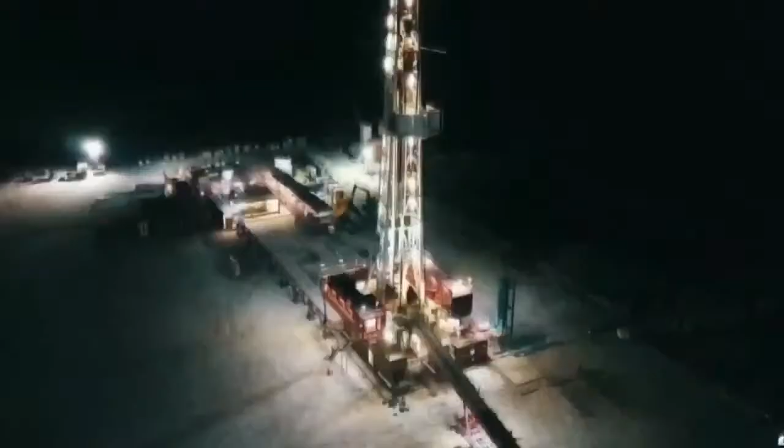Hello everybody, and welcome to the VDoor Locksmith Show. I totally forgot to put on my microphone. Gosh, where is that? The simple things that I forget. I haven't done the show in a minute. Wow, this is all wound up back behind here. We'll get to it. There it is. Rookie mistake. There we go, maybe now people can hear me better.

Okay, there we go. Hey everybody, welcome to the VDoor Locksmith Show, where I'm your host, David Gibson, where we're unlocking the secrets to success in the oil and gas industry, one interview, one presentation, and one technical screw-up at a time. Hopefully that's our only technical screw-up for the day, and it's on my shoulders, which I'm more than happy to be able to put that burden on my shoulders.

So happy everybody's here with us on an amazing Friday. This is the start of summer vacation, summer break. Kids are out of school. They're already sleeping in, having a fun time at the house. So today they asked if they could watch one of their favorite YouTubers today. Hopefully they're watching right now. Hopefully I'm their favorite YouTuber. Highly doubt it, but maybe me and Mark Rober can battle it out on who's going to watch today.

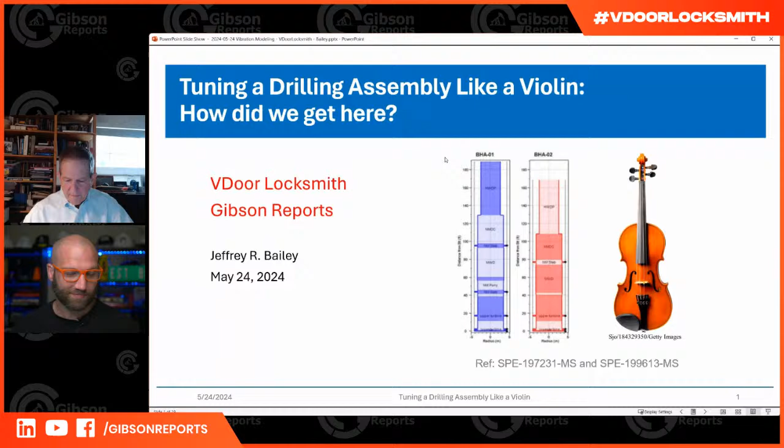Again, thank you, David, very much for having me on the show here. So I do want to start off with acknowledgements. I worked with many colleagues and managers. I saw Jeff McEachern's on the show, I worked with him some when he was at Eastern Canada, ExxonMobil. And this project ended up being quite well supported by the managers. Basically, from the middle 2000s until I retired, it was strongly supported by ExxonMobil management. There are so many people that I was involved with over the years that I really can't possibly name them all, but I will name three.

Fred Dupriest had a big impact on this because he recalled that I did the work in the early 90s, which we'll talk about a little bit. And then, of course, Paul Pastusek, I worked next to him for 15 years, and we had a lot of interactions on so many projects. The third person I'll mention is Greg Payette. He's a younger person than Paul and me, and he really has a lot of energy for data and data mining. I think he's going to have a great career. We had many great rig trips and stuff, so I really appreciate working with Greg.

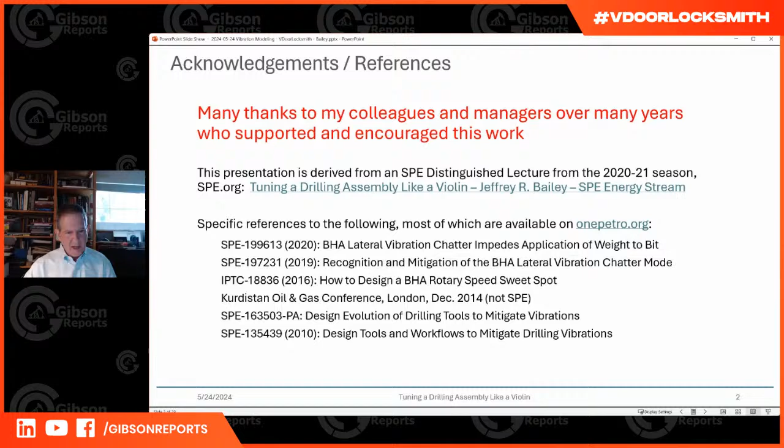But then there's like dozens of people who also were involved. So this presentation comes from the SPE DL. I'm going to have specific references to six references, five of them are SPE papers on onepetro.org. And then I do have one slide from the Kurdistan Oil and Gas Conference in London in 2014. I didn't go to that conference, the drill team sent me the slide, and I just included it because it's a good reference. So let's get started here.

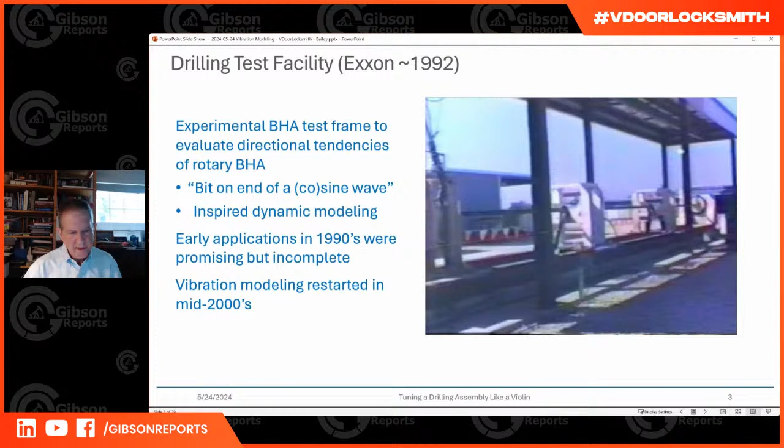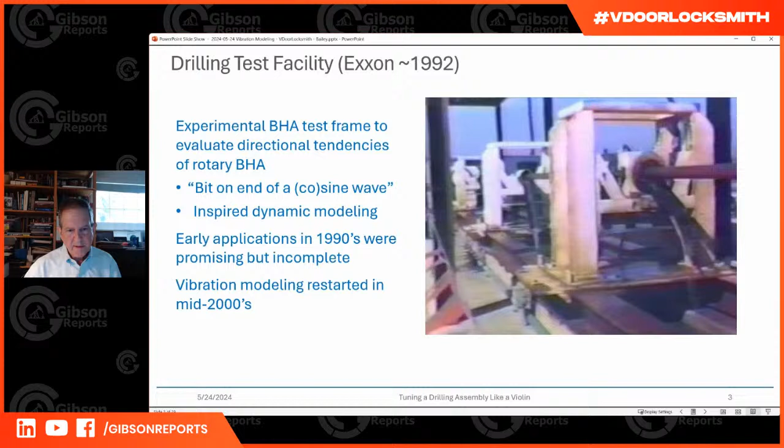So yes, I hired on in '89 with Exxon, and they wanted to understand bit walk. This was before rotary steerables, and there was a lot of platform drilling where they used rotary drilling to gain ROP. They did make runs with motors to make the turn, but then they went to rotary drilling. Here you see shots of it. Now we'll see a video of the movement.

The project was to take data from this apparatus and determine directional capabilities or tendencies of bit walk. We had an instrumented strain gauge at the bit measuring side forces and vertical forces, getting means and standard deviations and all that. But I wasn't actually able to transfer that into any knowledge about which way the bit would walk.

But we did develop a dynamic model, and we used it on some wells in the early 90s off the coast of Alabama. There was good traction with the drill team, but again, like I said before, we didn't really solve directional walk. So they wanted to put me on a different project.

But when you saw that movement, Fred always says the bit is on the end of a sine wave, and I put in the cosine here — I'll explain that modification in a few minutes. But certainly this apparatus inspired the dynamic modeling, and we had those early applications in the 90s.

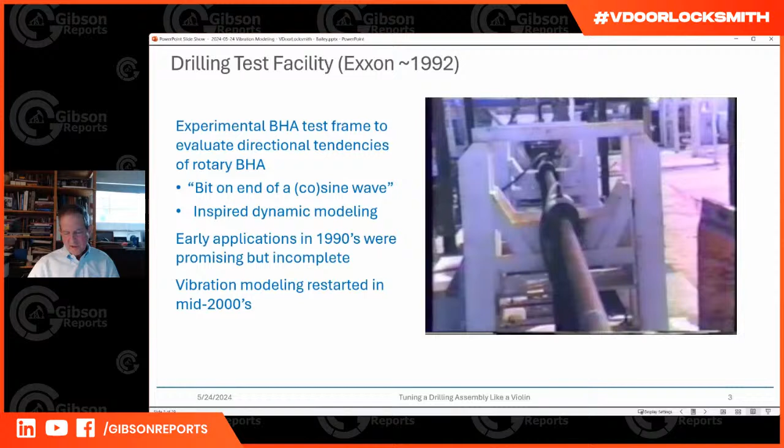As I said, they're promising but incomplete. It was laid down, and I worked on something else. Then Fred, in the middle 2000s, recalled that we had this vibration effort, and we broadened it to include torsional dynamics, involving the corporate strategic research up in New Jersey, Deniz Ertas. That became its own thing, but they were kind of coupled because they had very similar properties as two models. So that's kind of the origin.

Back in the middle 2000s, when we started to apply this, we took the C code and made a MATLAB model out of it with graphics, so we could do comparative analysis. We'd go out to drilling engineers and drill teams, and they'd be very interested. Of course, we had to work with the vendors, and we got a lot of reactions from them — there was a tremendous amount of myth busting going on.

Some of the things people said to me, which I recall very strongly — one person said, you need to stabilize every connection because if it can't move, it can't vibrate. That's a perspective I think is really misleading.

Then someone else said, we did a normal mode analysis on every BHA we ran in this field, but it didn't help, which was interesting. And then someone else said, you're telling me the exact opposite of what the vendor told me for many years. So that was also very interesting. Maybe we'll understand why in a couple minutes when I explain something.

But basically, we found no comprehensive understanding of how to approach drilling vibrations and BHA design through stabilizer placement, at least that I was aware of. There was a BHA run in South Texas by some people, developed empirically in the field as a low vibration BHA. We put it into the model and it actually looked pretty good, but I think they didn't have a model that did that — it was really just empirical. So people have figured things out empirically, but in terms of having a basic understanding through a model that could use different parameters and come up with a prediction, I felt the field was lacking in certain respects.

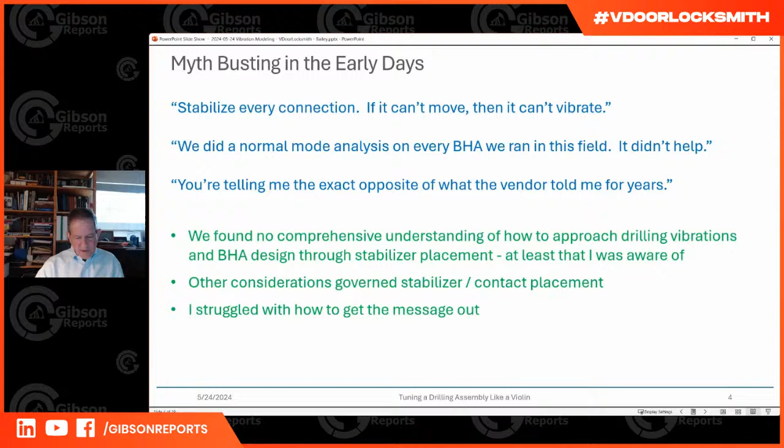So I came up with this slide. I had 3 kids, and they all played instruments, and they were in orchestras and whatnot.

I noticed every single time musicians played, the first thing they did was tune their instruments. So I started thinking, well, what we're doing is running BHAs without any tuning. If you go to a concert, how would it sound if the musicians did not tune their instruments?

I think that's pretty much what we're doing in many respects in the industry. We're running multi-million-dollar hardware into the hole, turning it, putting it through huge forces and moments, and expecting it to come out in one piece. But in many cases we're not even bothering to tune it for the operating conditions we're going into. So I thought maybe this was one way to get the message across that we need to do better. We need to tune our instruments.

When I started comparing the violin on the left with the BHA on the right, I noticed the drilling assembly is actually a lot more complicated than a violin. A string on a violin can pretty well be represented by a second order differential equation with two basic fixed nodes: down at the bridge, where the string is held, and up where the musician places a finger on the fingerboard. That length, and of course the tension in the string, determines the note that's played. So you really only have two fixed nodes.

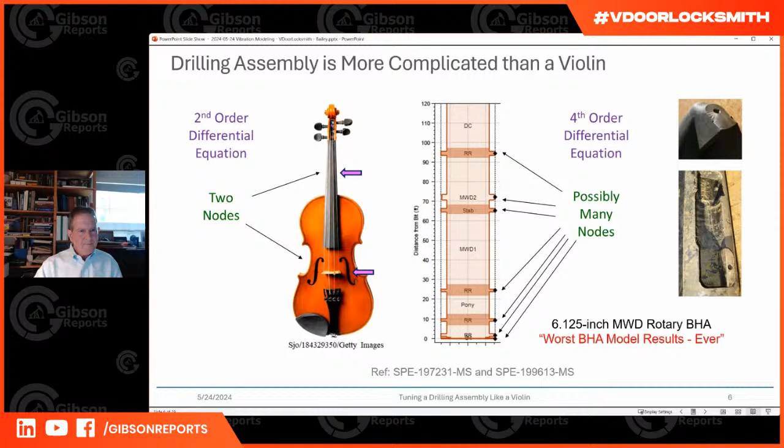I want to explain very graphically how this model works. It's a forced frequency response. As you see here, the BHA, the rod there with the striped tape on it, is being pushed laterally in an up and down, reciprocating motion. That's essentially what we're doing in this model.

We're pushing on the bit with a constant dynamic force, and then we vary the RPM. That's why I call this a cosine, because this is not a sine - we're not assuming the bit is a node, we're actually assuming it's an antinode. We want it to be a node, but that's in the case of a quiet BHA. In the case of a disturbed BHA, it's actually not going to be a node.

From this excitation, we calculate states all along the BHA - we'll see that in a minute. We calculate the bending strain energy across the entire BHA, and we call that a vibration index. Then we compare that response with different BHA designs with the same amount of excitation.

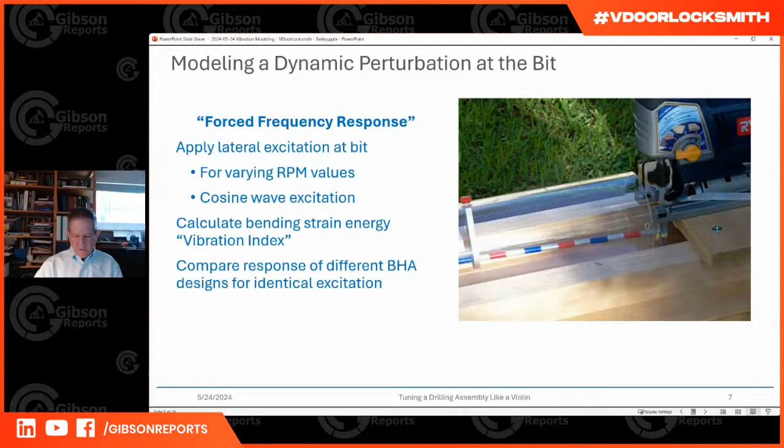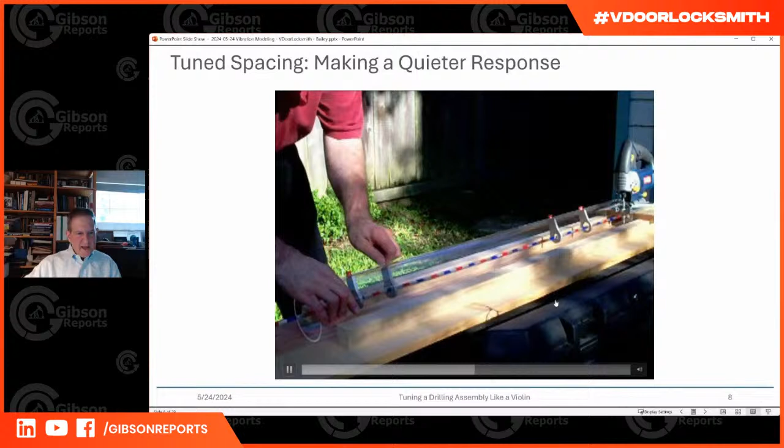We have a couple videos here showing this. In this case, we're going to move one of these blades and show a quieter response. Here we get quite a bit of displacement in the middle, but when we move this blade down, you'll see the response flatten out. Okay, so that's a fairly quiet response at that RPM.

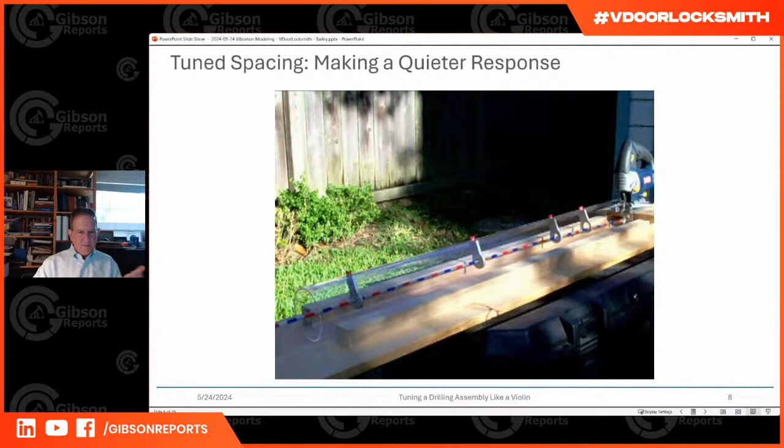What we really need is a BHA that has a quiet response across a range of RPMs. So in this, we'll show how this BHA has a smooth response across a range of rotary speeds. We're making it go faster and faster - you can see it's still pretty quiet.

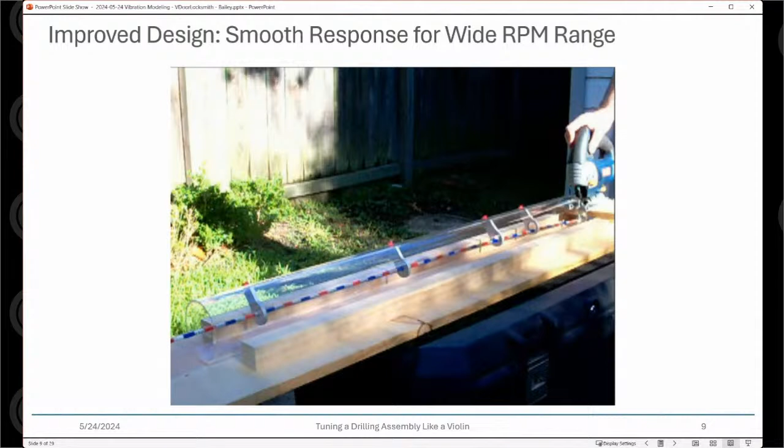So that's ultimately where we'd like to go - to get every BHA to have a flat and low response across the entire RPM range. It's actually hard to do. There are many challenges to get there, but that's where we're trying to go.

Okay, so Dr. Bailey, before we jump into the next part, we did have a couple of questions I want to get to. Robert asked, how about the model that was taught by Don Dareing and Bill Maurer in the 1980s?

Right, I'm somewhat familiar with their work. I wish I had a direct answer to that question. I'm sorry, I don't. Yeah, Maurer led those DEA projects and did a bunch of stuff. I actually don't know how it compares. I'll be honest on that one.

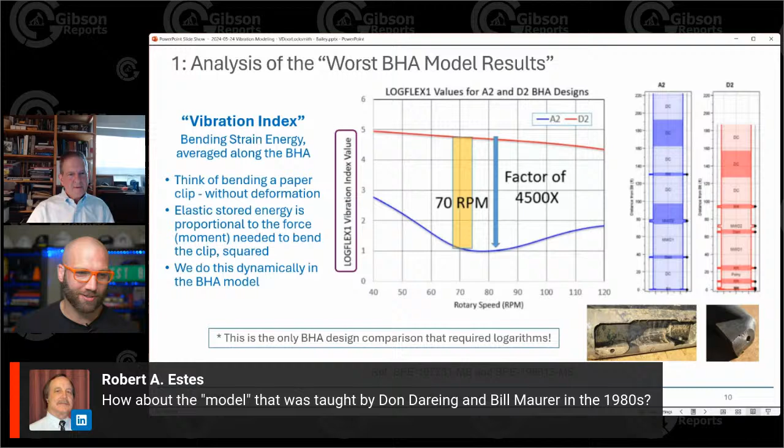Do you feel this lack of tuning has always been a problem, or is this something newer in the industry with all of the headcount reductions and economic pressures?

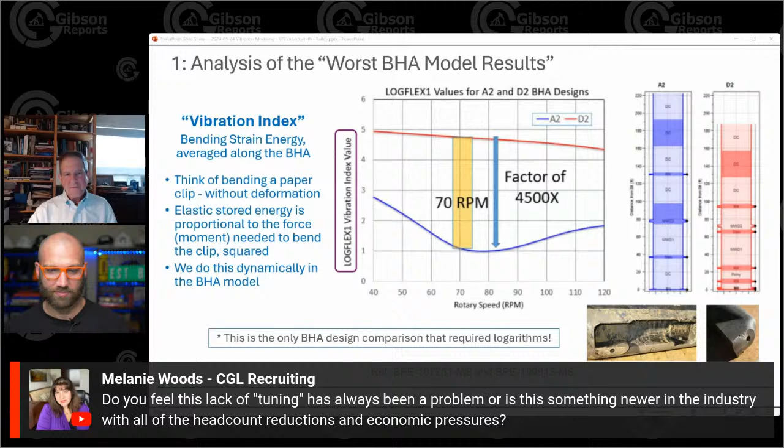No, I don't think it has anything to do with headcount reduction and economic pressures. This is fundamental physics. It's really a challenge that gets bigger as we get more complicated tools. As we run, like in some of the deep water applications, we're running multiple MWD tools, and then we're putting deep resistivity tools in there, and some of them are stabilized, some of them are not stabilized. And then at the top of all that, you have an underreamer. So you're cutting more rock, and you're trying to manage the weight distribution between the underreamer and the bit. And I think the problem is harder when you get more complex.

Now go to the other extreme. If you just have one stabilizer on a motor, you've got only one nodal point to worry about. And I guess we talked about that a little bit at the IADC. And that becomes a simpler problem. In fact, when you don't have any stabilizers, you can't use this model because it doesn't tell you anything. This is a tool to place stabilizers. And the more complicated the BHA, the more you need to use this model.

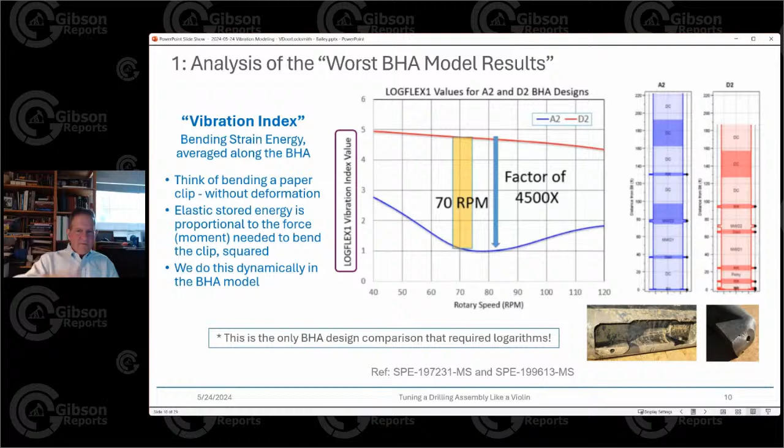So we're exciting at the bit, just like you saw in the videos, propagating the wave up the BHA, and then just summing the bending strain energy.

And so every beam has 4 states. The lateral deflection, its first derivative is the angular deflection. Its derivative is a bending moment, or related to the bending moment with some constants. And that has a derivative of the shear load. And so these large discontinuities in the shear load occur where there's a huge change in the bending moment. And these are driven by the little dots here where the nodal points are. And so you can see right where there's these 2 red dots close together is where this thing starts to take off.

This is why the change in that bending moment is related to the contact force. If you think of a beam of W weight per unit length, and it's of length 2L, and you just support it in the middle, the force is going to be 2 times WL. And that force is distributed within the beam by a positive shear load to the right of the contact of plus WL, and minus WL to the left of the contact.

So the change across the contact of the shear load is 2WL, which is the contact force. Every time there's one of these flat sections where the shear load is changing across the contact, that difference is the contact load. This is a dynamic force required for compatibility for the BHA to stay within the borehole. Otherwise, the displacement constraint wouldn't apply, and you wouldn't be in the borehole. So this is governed by the mechanics of the beam lying within the borehole.

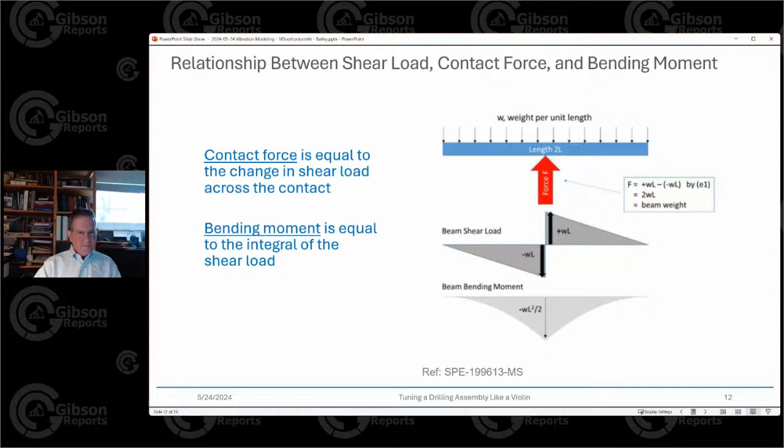When you get this huge change in the shear load, you have a large dynamic contact force. And of course, that gives you dynamic torque, which gives you difficulties in drilling. So we take this bending moment, sum it over the entire BHA, and call it an index, a vibration index.

Stepping up, what factors really govern stabilizer placement? There are common factors, like directional control, which certainly applies to the first three contacts. But a lot of the BHA is beyond where there's the first three contacts in many BHAs. There's the concern to have the LWD proximity to the bit. A lot of times you're struggling to get the tool that's most important for formation evaluation close to the bit so you don't drill much hole before you evaluate the formation. That is a legitimate concern. So you can see there are going to be trade-offs here.

Then there's what I've heard: we want to keep the BHA off the borehole wall. I think what they're really getting at is we don't want to damage the BHA. Maybe there are unintended consequences where we design something to keep the BHA off the borehole wall, but end up generating more problems by doing that than if we relaxed that constraint a little. That's related to the next one, which is protect the tools. These are some of the reasons I've heard for stabilizer placement - some are preferences, some are governed by the drilling mission of trying to get data. But people don't usually move stabilizers to improve the drilling dynamics. We'll talk about this example in a minute.

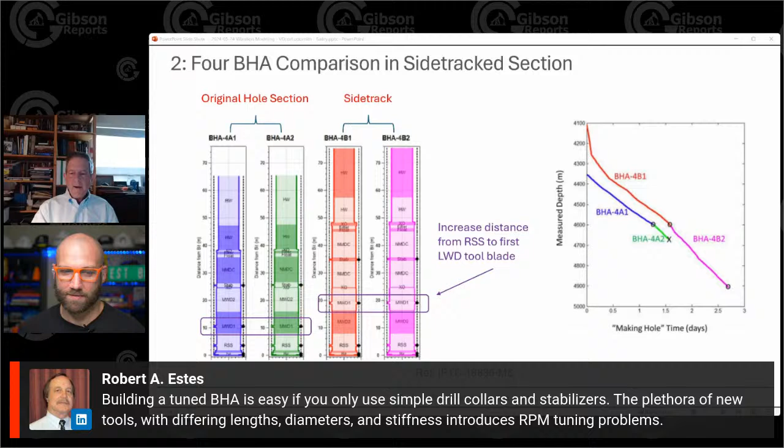If you do this a number of times, you start to realize that what you like to do is have it more constrained closer to the bit. Then as you go up away from the bit, you want to relax the constraints. If you have tools that have very thin walls, or are more flexible, and then new tools also introduce new lengths, they may not be the 30-foot lengths. You may not be able to put a pony collar in, for instance. We use pony collars quite a bit to space things out, because you have to have electrical connections, and pony collars typically don't have electrical connections. So I can understand the perspective here.

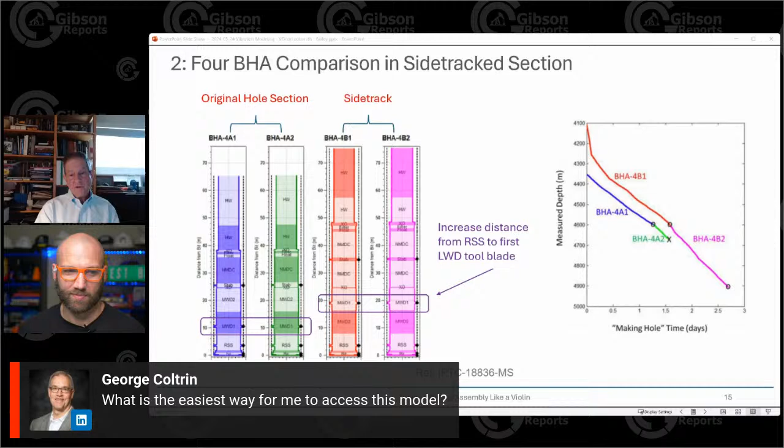A question from George says, what is the easiest way for me to access this model? It is a model that is used by ExxonMobil today. I would look to take some of these lessons and apply them in a commercially available model that you have access to. There are a lot of models out there, and maybe it's phrasing the questions in a way that are instructive from these lessons.

This one says LinkedIn user, but I looked it up, I believe this is Kennedy. Kennedy asked, David, confirm from the presenter, if this BHA presentation covers only lateral vibrations, does the presentation also cover torsional, stick slip, and vertical bit bounce vibrations?

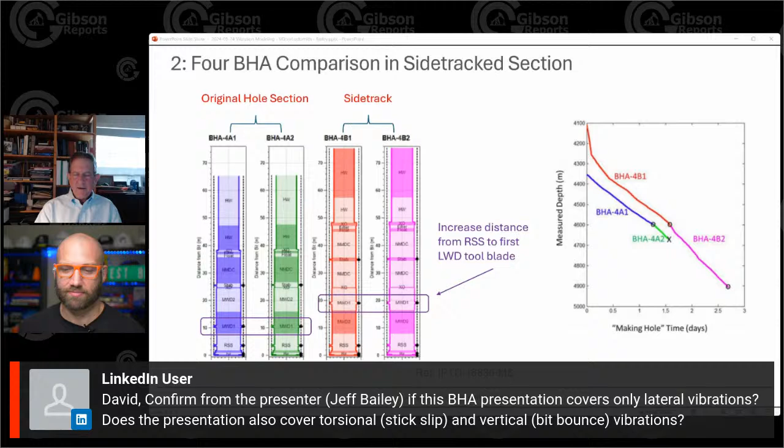So there isn't anything really here on bit bounce. Regarding torsional, I remember we talked about those dynamic contact forces, going back to, let's see, here we've got a contact here. This is a blade on a stabilizer, a nodal point here given by this red dot. And at this red dot, we have this huge dynamic contact force. So anytime you see this, you're going to have a lot of torsional dysfunction, because you're obviously going to be rubbing very hard, and we do see stabilizers come out an inch or more under gauge sometimes.

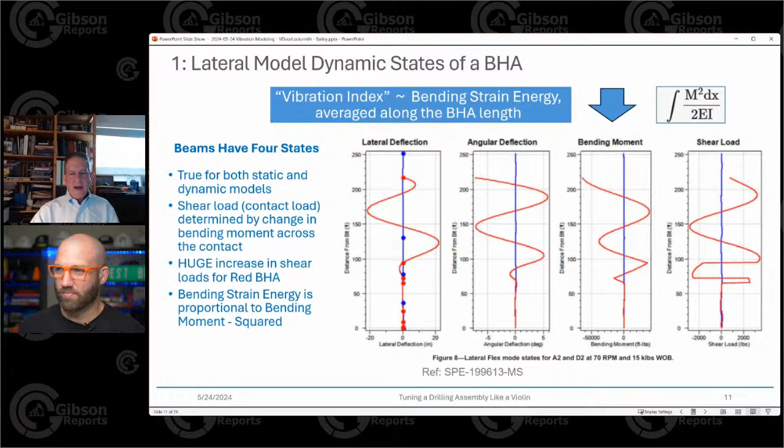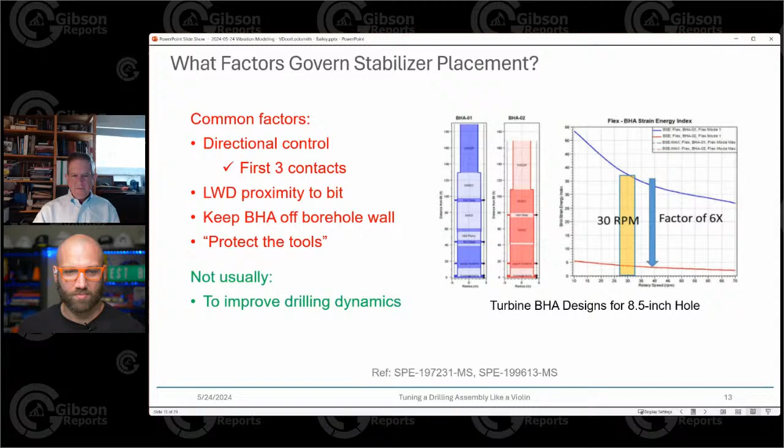I think it happens when we get a lot of stick slip, and stick slip is very complicated. Of course it depends on the entire length of the string and whatnot, but I think this makes a much more torquey bottom hole assembly, and we have some data that shows that. So yes, this does indirectly affect torsional vibrations, but not as directly as you might like. There is a specific torsional model that's a companion to this model, and that's talked about in other SPE papers. Final question for this part right here.

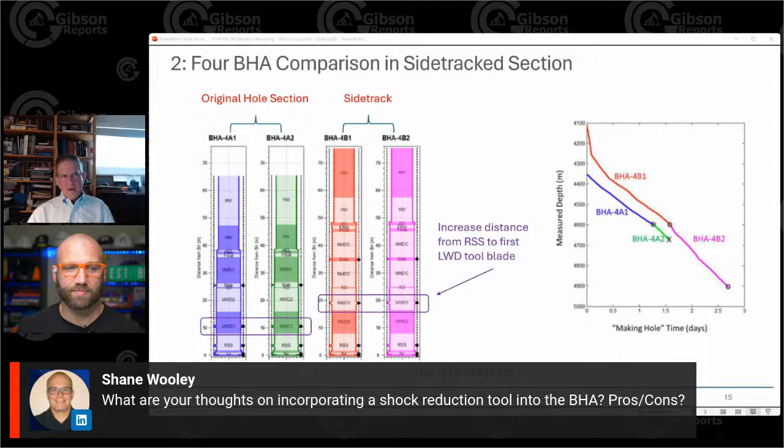Shane asks, what are your thoughts on incorporating a shock reduction tool into the BHA? Pros and cons. Yeah, so there are multiple types of shock tools. Some are just axial shock tools that are typically run in a big hole, shallow. Those shock tools, I think when they have the right frequency, can do a lot of good. My understanding is that it's a challenge sometimes getting them matched properly with the other dynamics, like if you're running a roller cone bit.

And then there's the torsional spring type of tool, and I think those can be very useful. But yeah, we have modeled BHAs with shock tools. The way we adopt it in the model is to reduce the effective diameter a little bit to account for that.

It's not as stiff as a drill collar, for instance, so we make it a little bit more flexible, but we put it into the model and can model it that way. But yes, I think shock tools can be useful.

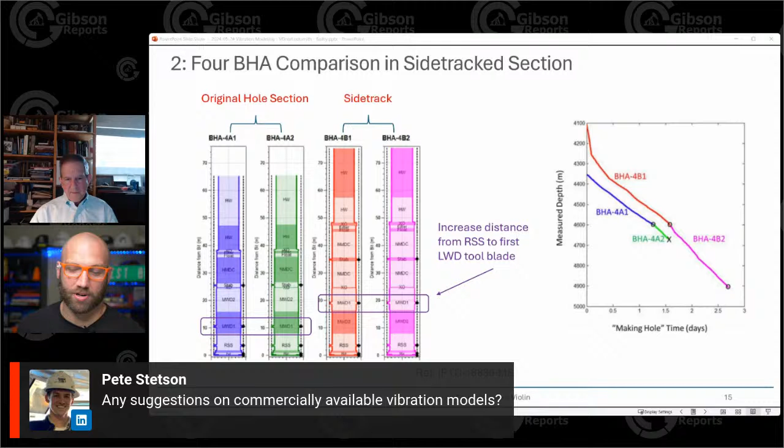We did get one more question snuck in here real quick. Pete Stetson asks, any suggestions on commercially available vibration models? Yeah, so I know DrillScan has some vibration models that are useful, and I have, of course, most familiarity with this one. But like I say, there may be lessons here from the way we approach the problem that could be adapted for use in some other models. Maybe think about it that way.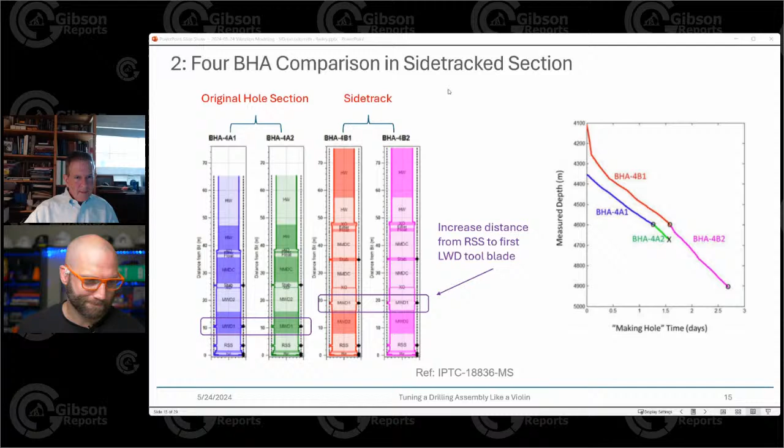Excellent. All right, Dr. Bailey, I'll let you take it away. Okay, so this is our second of 6 examples. And I think this question here is what is the best arrangement of components for my well and operating conditions. So I pulled this next example from an SPE paper or IPTC paper.

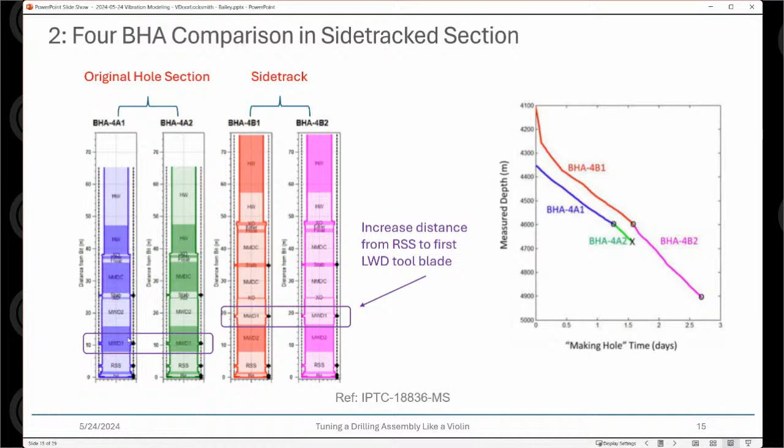I think it's really instructive because we had an interesting opportunity here where we had used this traditional configuration in the blue and the green BHAs. There's 2 MWD tools here, one has a blade, one doesn't have a blade. And in this configuration, which is the way the tool is normally run, we drilled for a bit and then we pulled out of the hole, changed equipment, and then drilled, but then we lost the BHA here.

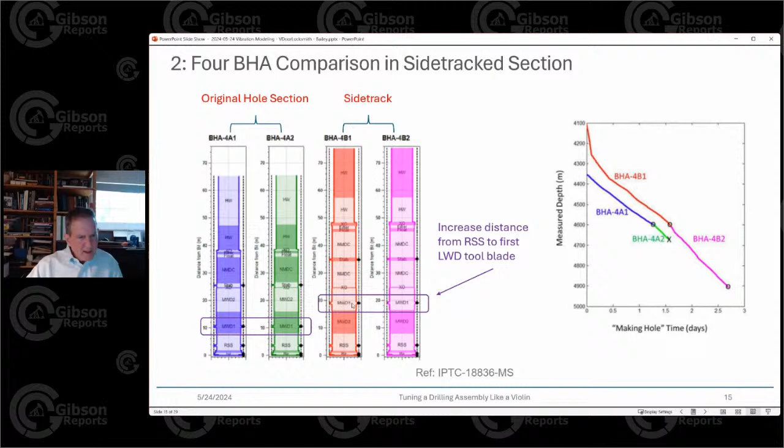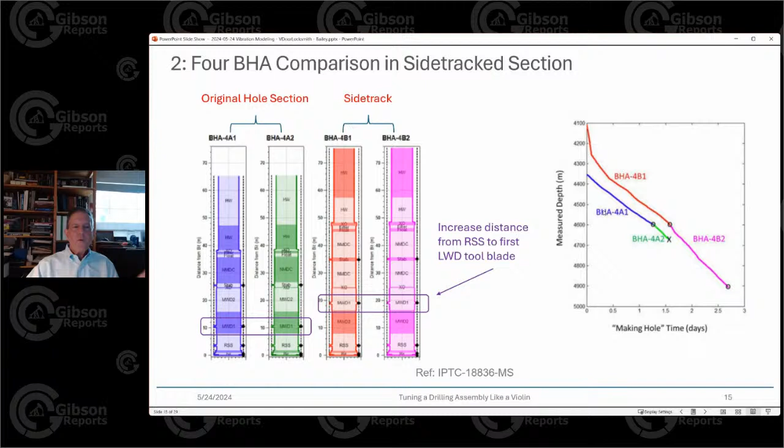I can't remember the exact reason why, but we had to sidetrack, and so we started shallower and came down with a different assembly, and we were allowed to make some changes here to the assembly. We were able to swap those 2 tools, and we also insert another drill collar to space out to this next stabilizer. And so we ran the red and the pink BHAs in basically the same rock parallel to the original borehole. So we're drilling the same rock. All we did was swap the tools. And then it made for a very interesting data set.

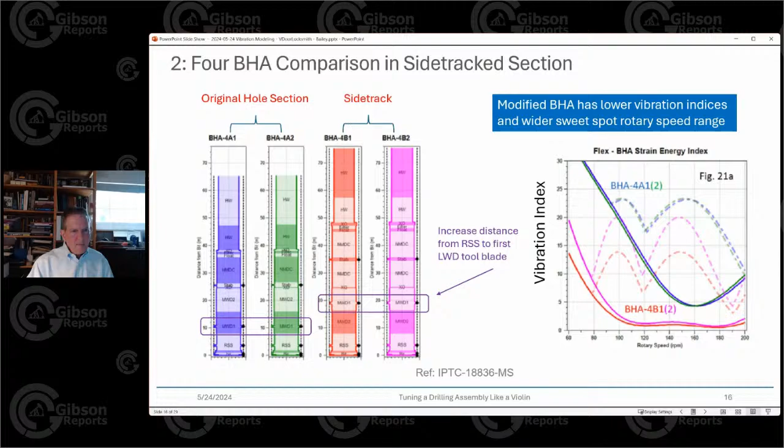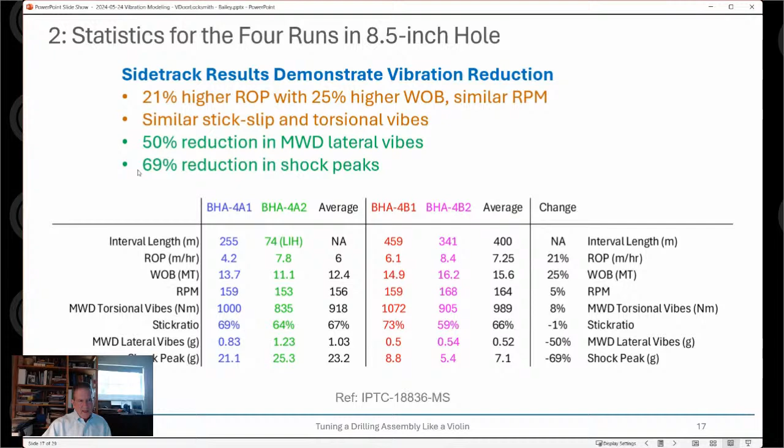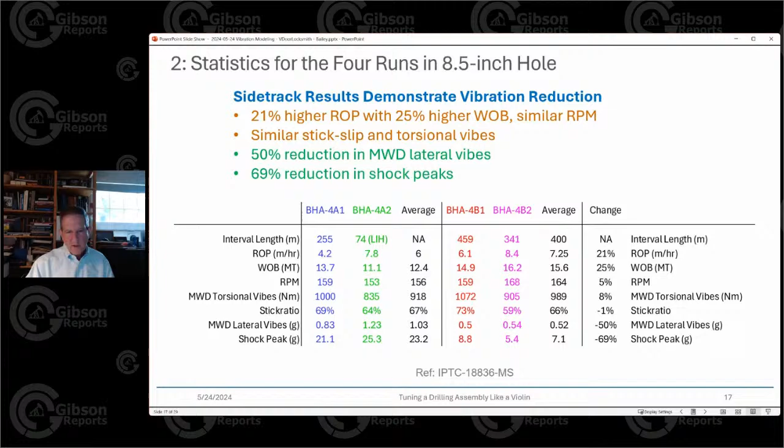So we did get the data from these 4 runs, and the sidetrack results demonstrated vibration reduction. We had 21% higher ROP on average and we were able to run 25% higher weight on bit operating at the similar rotary speed range. And even though we had more weight on bit and higher ROP, we had similar stick slip and torsional vibrations, but we had a 50% reduction in MWD lateral vibrations and a 69% reduction in shock peaks. I should have had torque in here, but I didn't. Sorry for that, but you can see that on average, we're drilling faster, we're pushing harder on the bit, we must have had more torque. But the lateral vibrations and the shock peaks all were reduced. So we were very enthusiastic about those results.

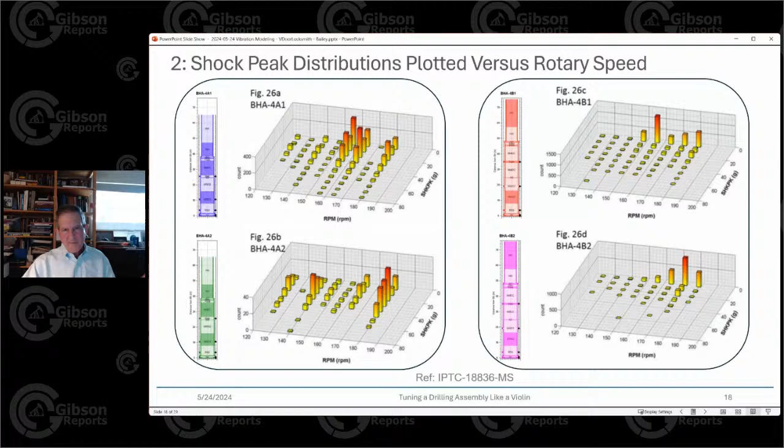But if you look over here at the red and the pink, we've got much lower shock peaks, and it's a very significant improvement in our shock peak results. So we're drilling faster, we're able to carry more weight on bit, and getting about the same stick slip, with much lower lateral vibrations and shock peaks.

So this well gets finished, and they're drilling the next well. Which BHA do you think they would use on the next well? Well, of course, they went back to the blue and green configuration because that's their standard configuration.

And this is an opportunity where the proximity of the MWD tool to the bit is a more dominant design choice for the drill team and the vendor in this particular situation, even though we demonstrated lower vibrations, faster drilling, and higher ROP with the alternate configuration.

So it's kind of instructive, what are the priorities? And of course, what I would like to see would be going back to the drawing board and saying, well, where could we position the blade on this tool, still get about the same proximity to the bit, but maybe not have this drilling dysfunction? But that would require a redesign of the tool, and of course there's nothing you can do in the field at that level.

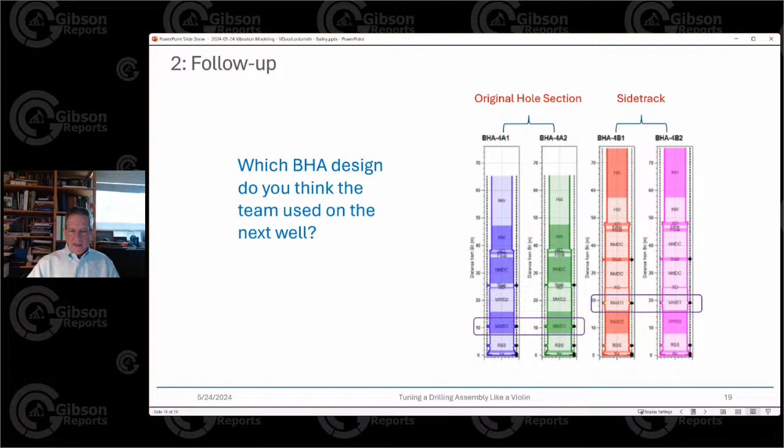And we have actually in this BHA 11 meters between the under-reaming tool and the next stabilizer. That was something that at the time was very unconventional and something they really didn't want to do. That was considered too much spacing. And I think part of it had to do with just general practice, but also thinking, hey, this is basically a horizontal well - what's going to happen with the under-reamer not being centralized in the hole, right where it's operating. So that was a big concern.

But the results are pretty good. They were able to drill with 24,000 pounds average, 88-degree hole angle, 130 RPM, which is pretty close to the sweet spot. They made 41 average meters per hour and up to 69 meters per hour. Lateral vibrations were typically less than 2 Gs, low stick slip with a sticking ratio less than 0.4, and they actually said in the report, zero axial vibrations.

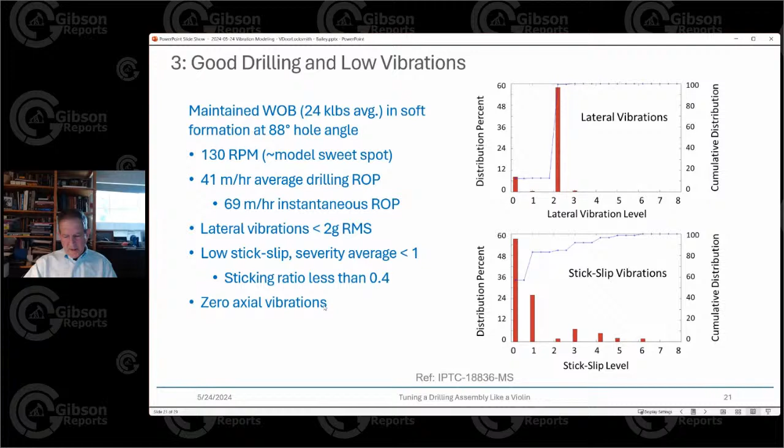This was actually on a platform where ExxonMobil had just taken over operatorship, and there had been 21 other wells already drilled with the same vendor, with an average ROP of 13.5 meters per hour. On this first well, we obtained 41 meters per hour, so it was about a 3 times ROP improvement with this particular BHA.

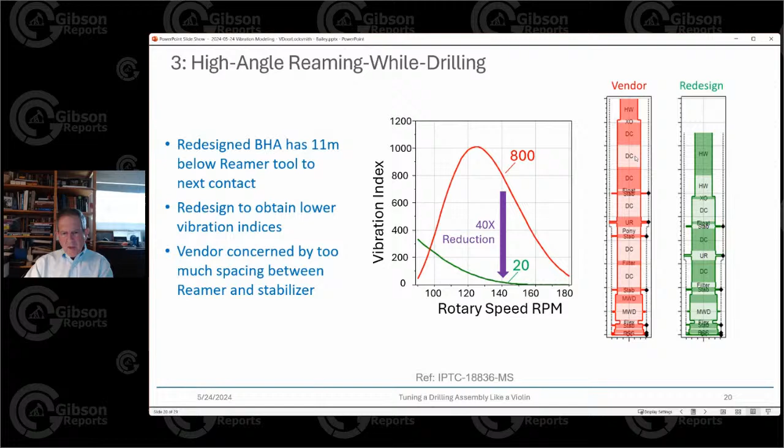And again, the main difference here is putting 11 meters between the under-reaming tool and the stabilizer, removing one of these nodal points, and it's pretty much stabilized the same on top as the original BHA. I guess we took off a couple of drill collars. But they were pleased with this BHA and used it on many of the successive wells in this field.

So this fourth case study - this is a slide that I actually did not write. It came directly from the drill team, and they presented it in a poster session at the Kurdistan Oil and Gas Conference in 2014 in London.

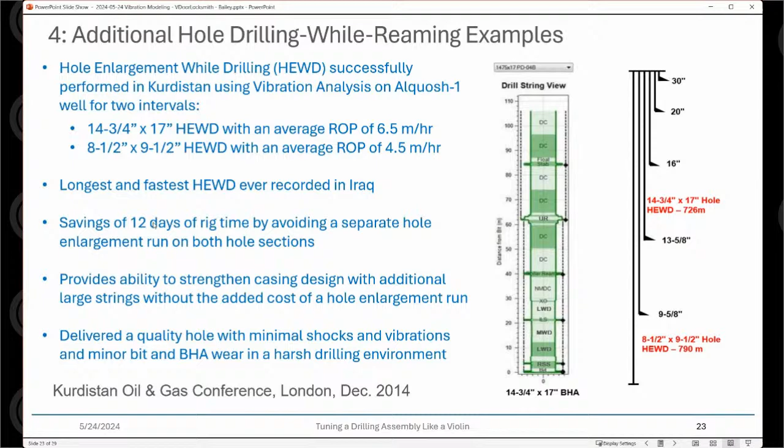And they cited 2 hole enlargement while drilling BHA designs, the 14¾ by 17 inch and the 8.5 by 9.5 - 726 meters here, 790 meters here. They did these in one run each. They're citing 6.5 meters per hour and 4.5 meters per hour, and they wrote this was the longest and fastest hole enlargement while drilling ever recorded in Iraq, saving 12 days of rig time by avoiding a separate hole enlargement run.

And the reason they got into this situation is because of H2S concerns. They had very thick wall casing, and they actually tried to run alternative designs, but they couldn't get the BHA to bottom because of the constraints on the well. So they ended up wanting to place these stabilizers spaced apart from the under-reaming tools, and they basically sent me a design and said, 'How does this look in the model?'

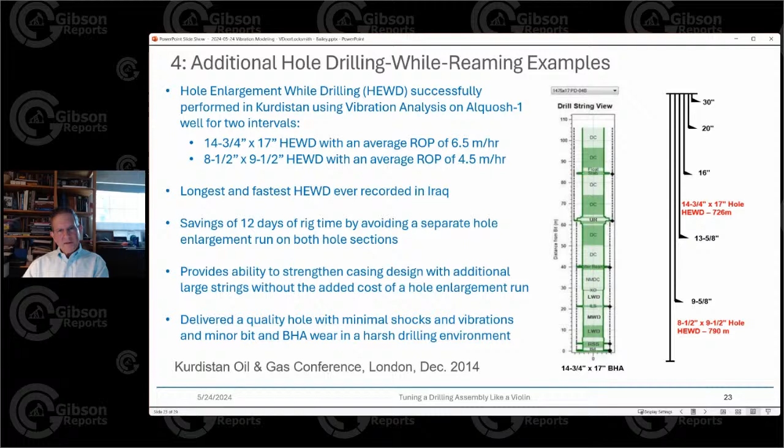And I wrote back with the results, 'Hey, it looks great. Go ahead and run it.' And they did, and this was the result. So sometimes we try to push from the model side, and sometimes the field pushes back and says, 'This is what we have to do. How's it look?' Same thing happened with some of the deep directional resistivity tools. One vendor doesn't really stabilize them, and when they started running those BHA designs initially, it was like, 'Hey, this looks really great,' and they had good results. So spacing out is kind of one of the things that comes out of this model.

So number 5 here, our second to last example, turbine BHA in a deep well. This is unusual in that it is the first time this model was actually operated and run by a drilling engineer working within a drill team. And this person was an unusual drilling engineer. He had a PhD and started a research company, but he had some very interesting results here.

So he inserted this pony here in this red BHA initially, because that had lower vibration indices than before he had the pony in there. So he thought he was working towards optimization. He ran this 3 times, and they really didn't drill very far on each run, and they pulled out several times. And he decided there was a case to really look at an alternative BHA because they weren't getting very far fast.

So he took out the pony collar and took out the stabilizer and came up with this green design. There's a factor of 8 reduction in the vibration index at the surface rotary speed of like 30 to 40 RPM, and the ROP improved. They had 5 runs to TD, as shown in this chart. The ROP increased 60%, the run hours are up 68%, the interval length increased an average of 150%, and the MSE declined.

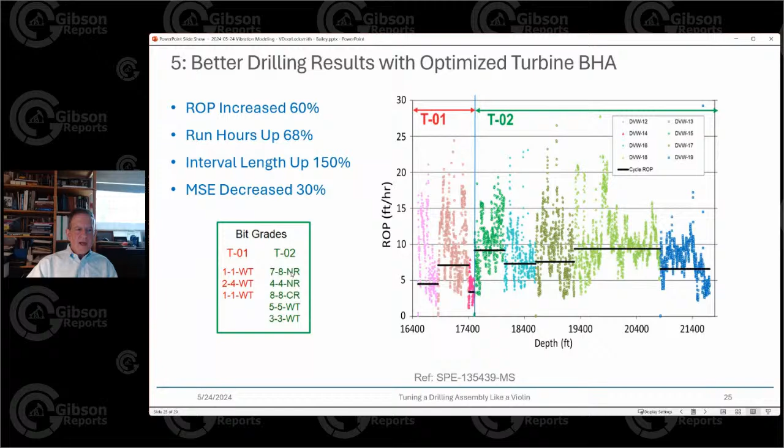What I found really interesting was what happened with the bits. In the red BHA, they were coming out whole with a 1-1, a 2-4, and another 1-1. So they weren't really getting weight to bit. Unfortunately we don't have pictures of the stabilizers to show what they looked like. But why weren't they getting any weight to bit, and coming out of the hole with very low ROP? With the green BHA, the first one, they got a 7-8 on their bit. These were diamond impreg bits, so now they're obviously getting weight to bit. The bit is wearing as they're cutting the rock, making more hole and faster ROP. So you can see we're getting more weight to bit in the green BHA versus the red BHA, and the only thing that changed was the spacing of the stabilizers and the decrease in the vibration index accordingly.

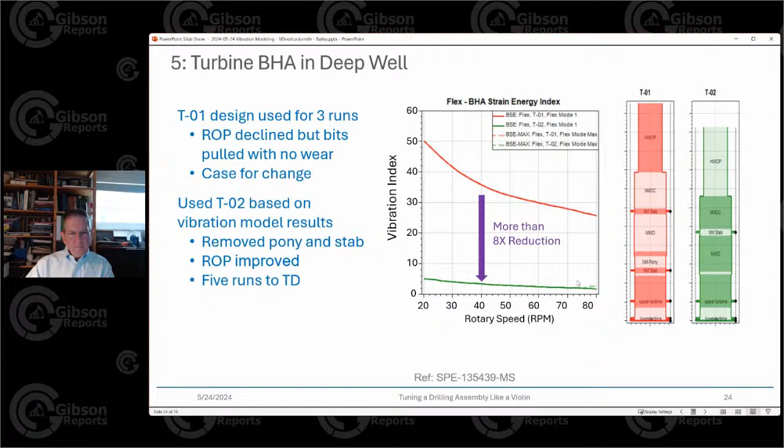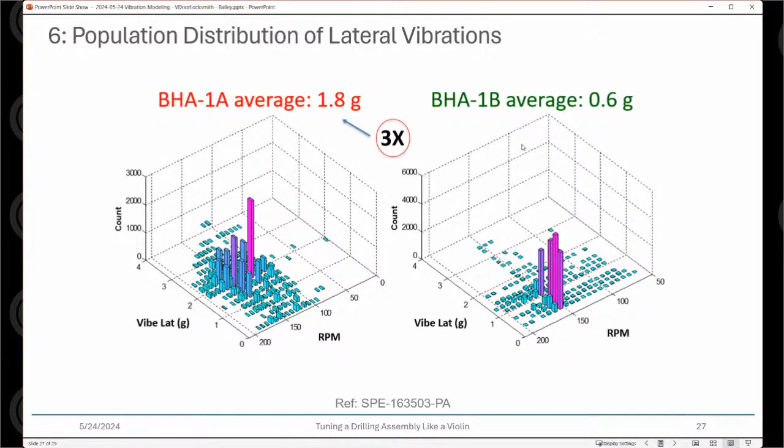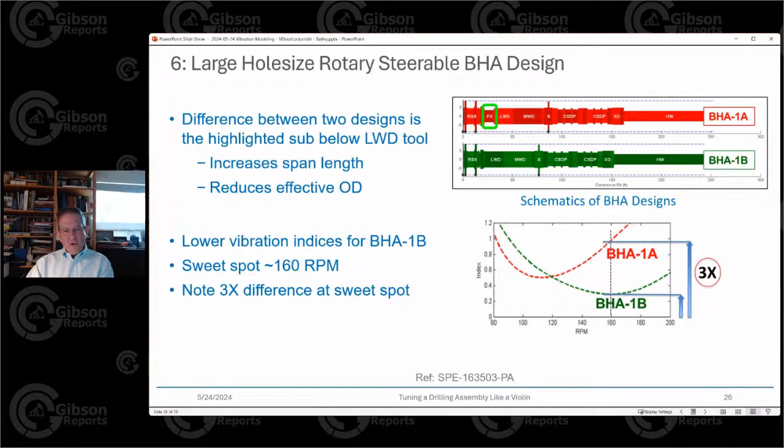So they drilled, and these are the population distributions of the lateral vibrations. We've got RPM on this axis and viblat on this axis. The average for the red BHA was 1.8, and the average for the green BHA was 0.6, which is a factor of 3, exactly what was calculated. I'll tell you, this is a miracle actually, because we don't typically get this kind of correspondence between the vibration index and the vibration measurements, but it's pretty astounding that there's this factor of 3 difference right here.

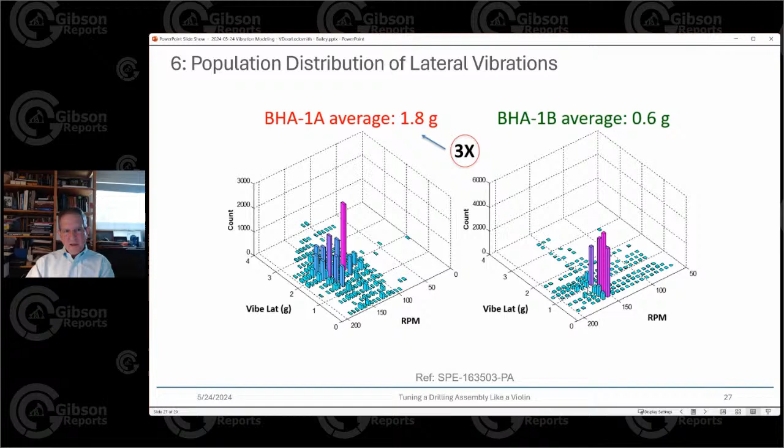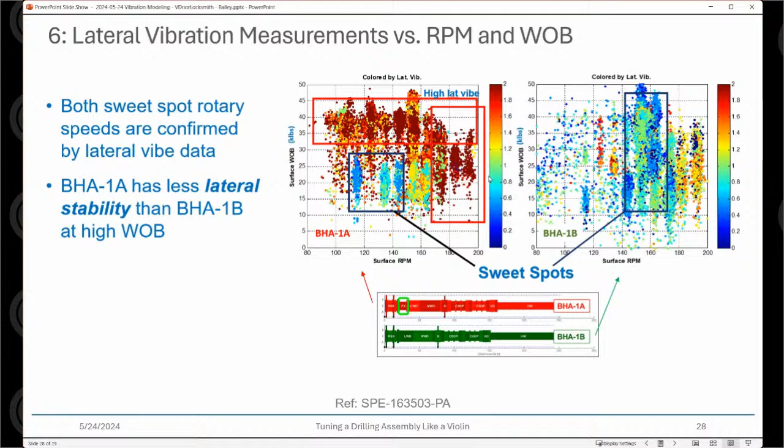If we look at the green BHA, we've got a sweet spot at about 160 RPM, with red and yellow dots to the left and right. At our preferred rotary speed of 160, we've got mostly green and blue dots all the way up to 50,000 pounds weight on bit. So here we're able to carry much more weight on bit with the green BHA than the red BHA, because the flex sub introduces flexibility in the BHA when we want stiffness, and because we're operating at a non-preferred rotary speed for that BHA.

This is a very insightful example of what we're achieving when we're able to get a good sweet spot and maintain stiffness along the BHA. Getting back to the question about introducing new tools with various configurations—here we had a smaller diameter tool, and it introduced something that gave us a dysfunction at high weight on bit.

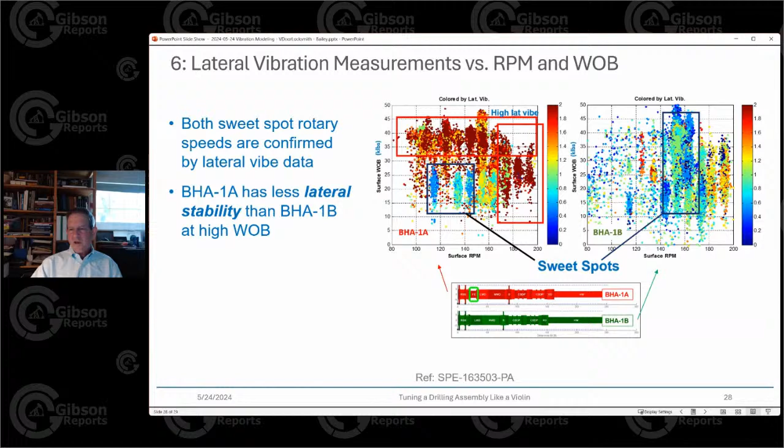So takeaways—we can open this up for discussion, but I want to make a few points. I think this work proves that drilling performance does vary with stabilizer position. It's important to remember that the natural frequency of a span varies as 1 over the length squared, so when you move contact positions, you've got that 1 over length squared dynamic going on. Harmonic analysis can lead to insights on effective BHA redesign, and we target sweet spot rotary speed ranges by adjusting contact locations.

This is done routinely using this model. Stepping back a little, what are some of my observations? Operators rely on service vendors to show up on location with optimized equipment. This model helps us get to that position with the vendor, but it's a really hard problem to solve when there are limited design variables only weeks before drilling. In some cases, like when we swapped those two MWD tools, we're really talking about a year or more if we go back to the drawing board to generate a new tool with a different contact location, because we believe, based on modeling results, we'll get better dynamics. So you start to think about going back into the design cycle with some of these concepts.

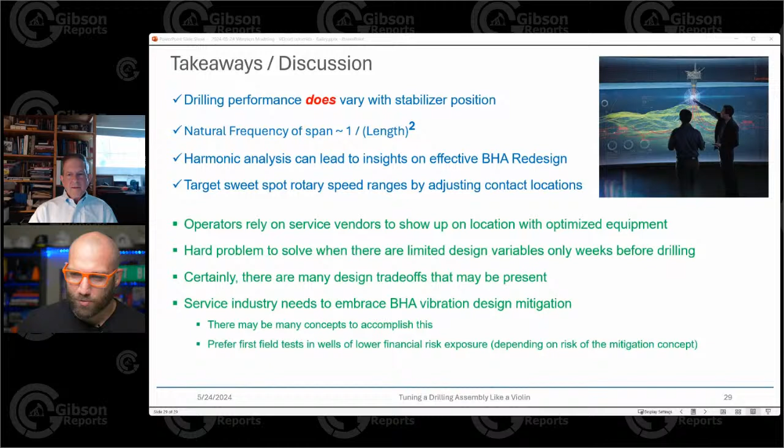Yeah, we've definitely got some questions here. We'll go back and we'll try to go in order.

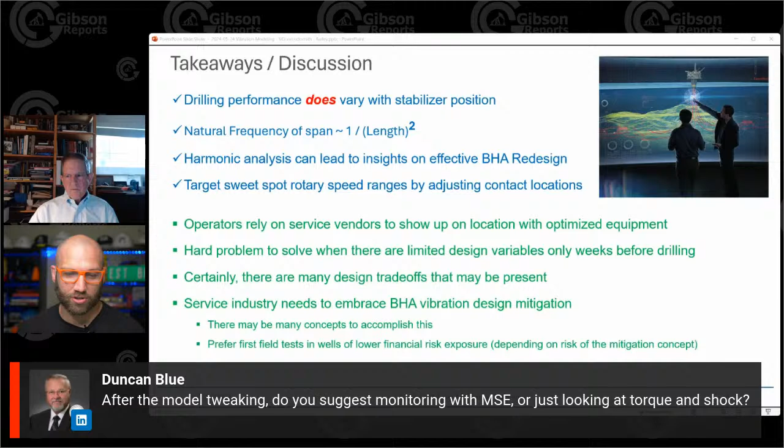Duncan Blue asks, after the model tweaking, do you suggest monitoring with MSE or just looking at torque and shock? The basic concept is to do the best job you can optimizing your BHA design and turn it over to the drill team, and they use their best practices for operating with the best results. That includes MSE monitoring, looking at shocks and torque and whatnot. But this is really the upfront design. We suggest, hey, this might be a good rotary speed to look at, but there are many cases where you go from the design, and when they actually screw the tools together and give you a BHA from the strap dimensions at the rig, there can be some subtle changes because they picked up tool A instead of tool B, and they give us the dimensions for A, but B is a little bit different.

So there's always a little bit of wiggle room around some of these numbers based on variations in field components. George asks, do you have experience using soft torque systems, software tool added to top drive?

If so, do you find them to be effective and helpful? Yes, soft torque and soft speed are good systems, and yes, they are helpful. I kind of think that every rig should have it.

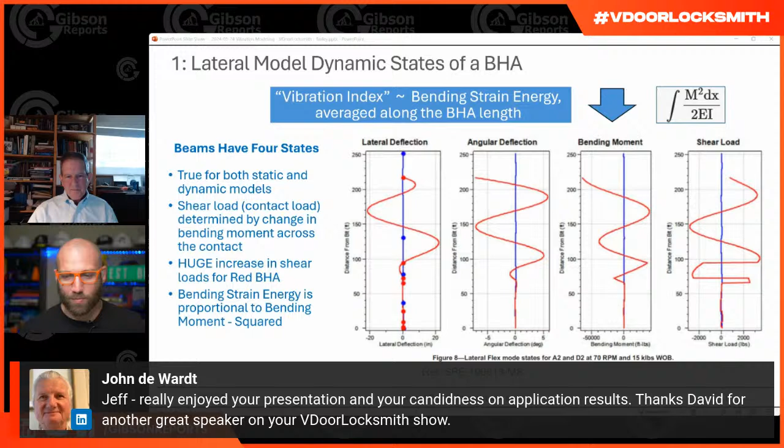Another quick comment, Jeff—really enjoyed your presentation and your candidness on application results. Thanks, David, for another great speaker on your show. Well, John, you're more than welcome. Once again, thanks to our sponsor. A couple of people put in the hashtag VDoorLocksmith.

Thanks for doing that, guys. Another question here from Kennedy, who figured out he comes up as a LinkedIn user, so he's posting this: what is the best position for the agitator in drill string assembly in order to minimize vibrations?

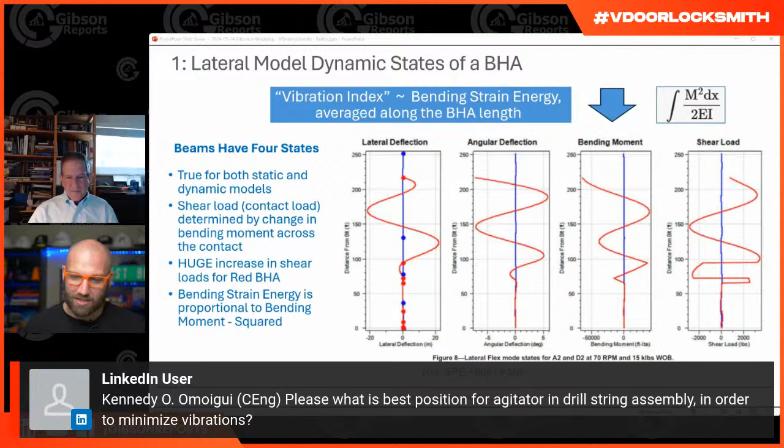Okay, getting back to what I was saying, the influence of an excitation, at least in the lateral sense, goes as 1 over L squared. So if you're several hundred feet away from the BHA, to me it's almost like going to infinity—it shouldn't affect lateral vibrations. With regards to axial vibrations, I think you could get some influence, but if you're not really close to the BHA, several hundred feet away, you're giving yourself a little latitude so you're not actually just pounding on the BHA.

Well, Dr. Bailey, thank you so much for being here with us today. A couple of people saying great show today, David. Thanks so much for your insights, Jeff. Thank you, David, for the efforts. Special thanks to Jeff—this is a wonderful presentation, lots of people out there enjoying your work. Thank you very much, David, I really appreciate you inviting me to the show. It's definitely one of these things, we're probably going to have you come back again and do even more. I know this isn't the only topic you can talk on.